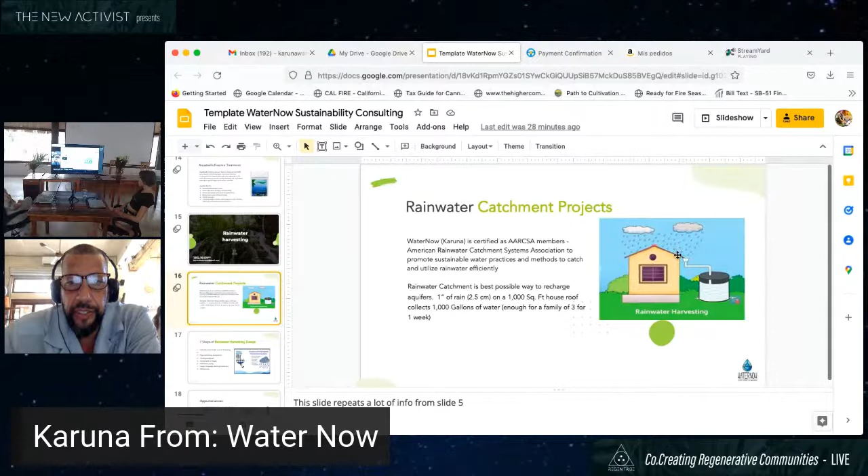They're usually always placed, like as in this picture here, on the corner of a house. So it could be the front corner, it can be the back corner if you don't want to see it. From there, with the roofing coefficient, we can calculate how much yield we're going to get. And then there we can go into the components of the actual system.

For the components here, the things that were needed to install here are a gutter guard screening, and this is basically to keep anything like insects and bugs, etc. out. And then we would use a rain head leaf eater, and then we'd have a tank screening. It's like a second layer of screening into the water filtration into the rainwater.

A water diverter. This is to siphon off extra water so the tank doesn't flood. And then we have the rainwater storage, which is the actual tank. And then we have the overflow system. It's basically a nozzle that can divert water. And then if needed, you can have a pump. And with the submersible pump, let's say a 1/4 horsepower submersible pump, you can put that pump into the tank, and it'll pump it to anywhere.

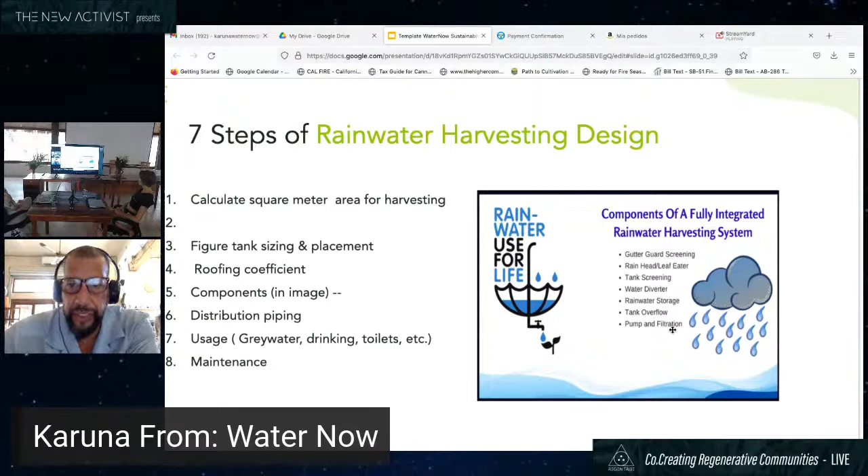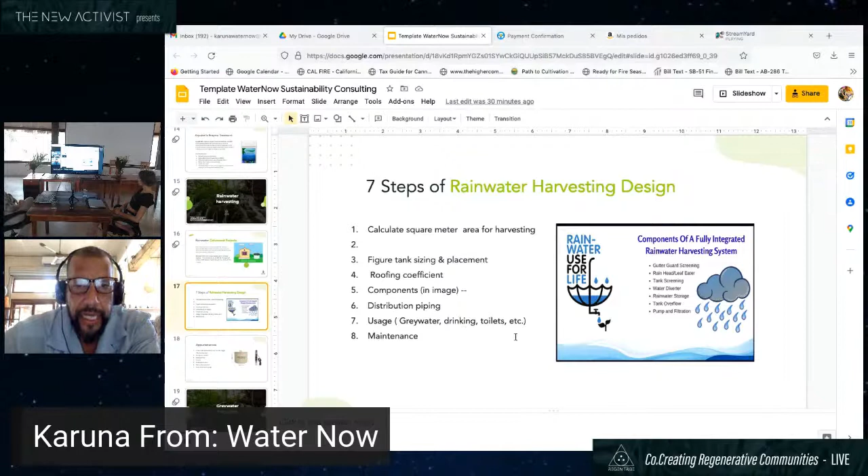You could pump it to your showers. You could pump it through your kitchen. And you could also put a filtration system if you really wanted it to be a high quality drinking water system. So let's see. The next step would be the usage, which could be gray water, and we'll get more into gray water recycling now. And from there, again, you can use this for anything you wanted to use the water for.

Here's an example of a submersible pump and a rainwater catchment tank. This is the 5,000 liter one. This was for quite a deep well, actually, and it was a 1 horsepower pump, and it pumps up to 33 gallons per minute, which is over 100 liters per minute. And with these, again, they have the filters, the screens, the gutters, filter system optional. You can also put a meter and pressure gauge optional if you really want to use this for like a drinking water system, for example.

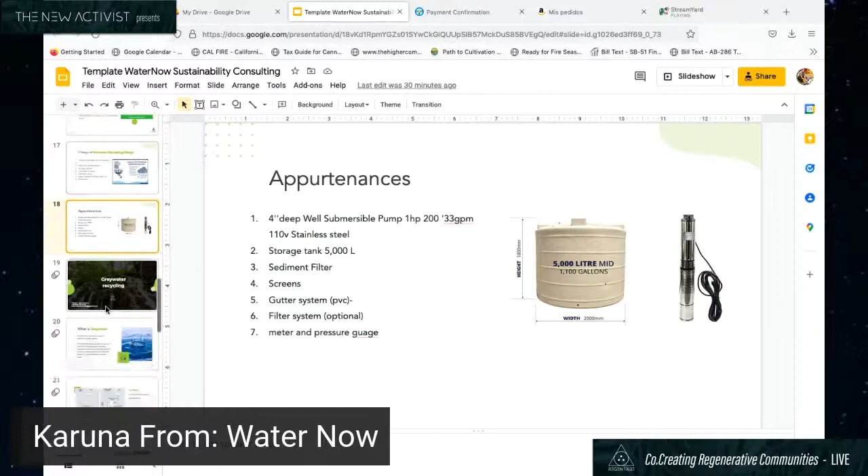Something else I would like to touch on now that's really important and starting to be done more in Europe and some places in the States, to a lesser extent here in Central and South America, is gray water recycling. So, what is gray water recycling? Gray water can be defined as any type of water.

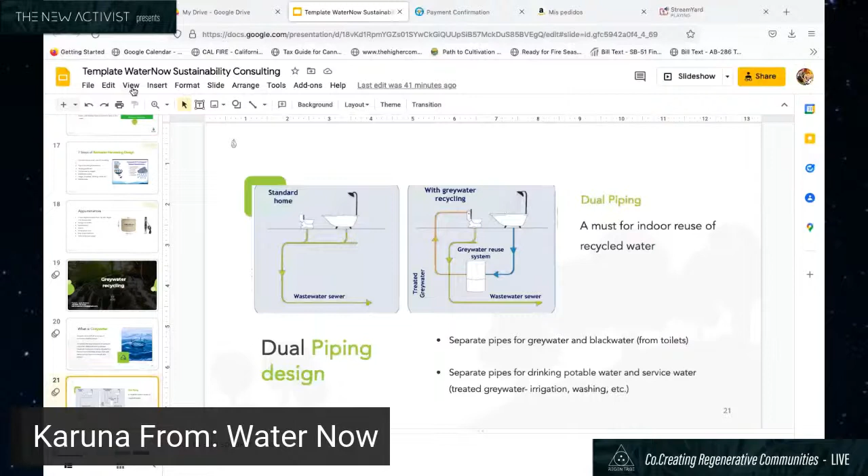So basically, this is the dual piping design here, and basically, wait, let me go to the slideshow here.

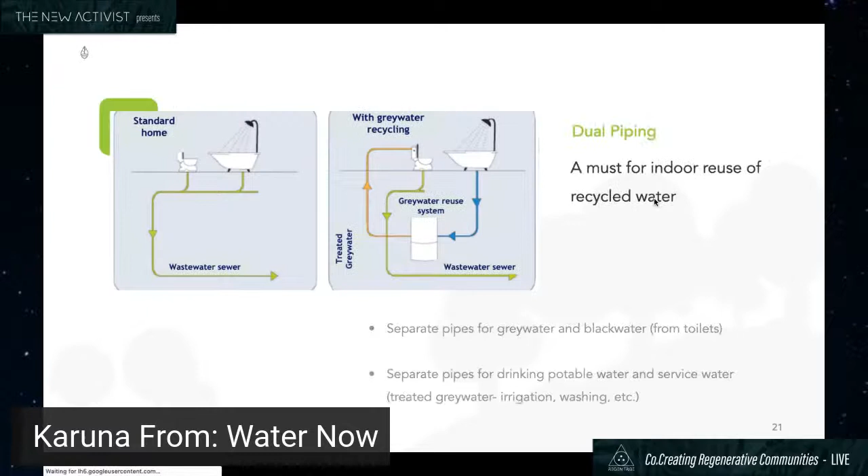Apologize for this. Okay, so this is the dual piping design, and basically, in order to get a gray water recycling system done, it's not really that complicated. It's definitely much easier to do when you're first setting up a community or a home or a system, because the standard home, the way it's plumbed right now, is that the black water from the toilet is connected to the showering system or the bathwater system. So you'll have those two connected, and they all go out into the wastewater treatment.

Then obviously what you have is a lot of gray water that comes from this first image on the left. And then they all get intermingled in, and then they can't be recycled. They have to be treated as hazardous waste or treated some other way from a treatment plant. With gray water recycling, moving to the image on the right here, what happens is that the toilet flushes, and then from there, that is the arrow that goes straight down and into the wastewater sewer system.

And then if it's, for example, a low flush toilet where it would have basically like a urine in there, then that can also be retreated. It doesn't have to go into the black water system. So what you have basically is a gray water reuse system here. And what this is now, and you're at the shower, the bathtub on the top right side, and you have the blue arrows going down here. As long as you're not using heavy chemicals in your shower and somewhat of an organic soap or shampoo, then you can rather easily go through this bin here.

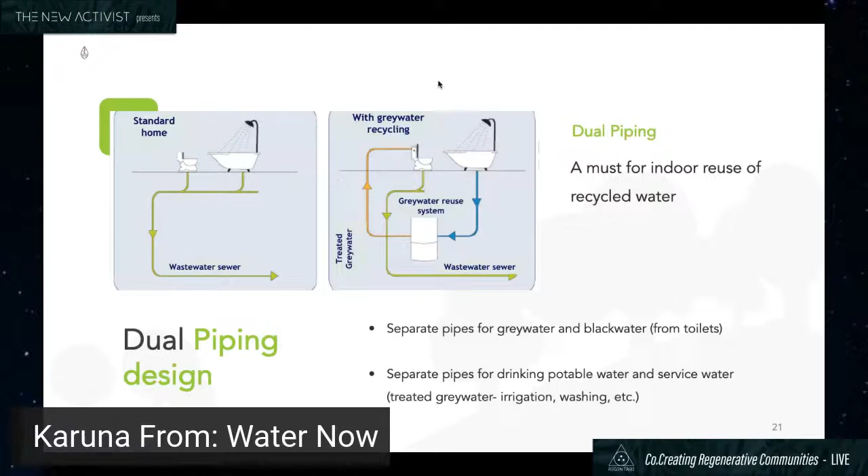So just that one simple step of plumbing your shower system to a gray water reuse system and then back into the toilet, just that one step will save 50 to 80% of water for any household or community or village. And it's very rarely done. Matter of fact, it was illegal in the States up until some years ago, which didn't make any sense. But anyways, now it is actually suggested by most of the communities there.

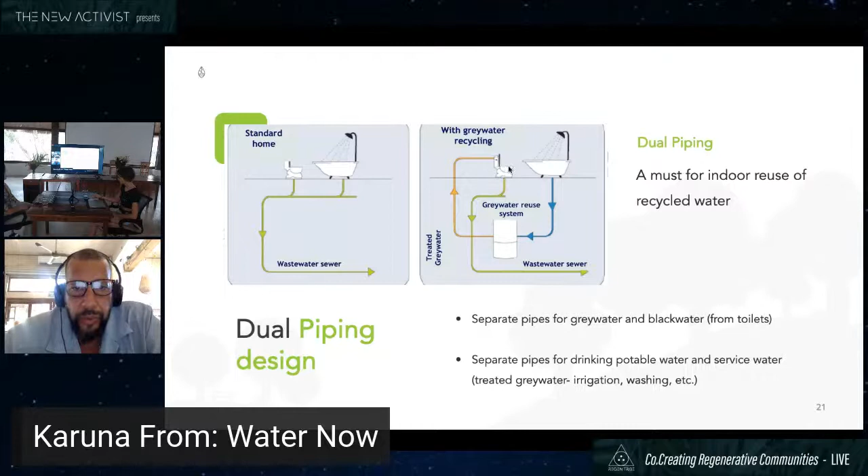Here's some technical considerations I'll go through rather quickly, but a pre-treatment sediment filter stage should use self-cleaning sieves. This would be to remove things that could come through the shower or the bath, like hair, lint, sand, metal, plastics. If kitchen gray water is used, we would install a combined grease and sediment trap. Here's a space requirement per person. So, for example, 3 or 5 people, it tells you how many meters squared it should be. Depending on pollution load, water peak flows, and quality, you can find out how big the piping would need to be. One of the biggest things here would be to label your non-potable pipes and your tapping points to distinguish from the drinking water.

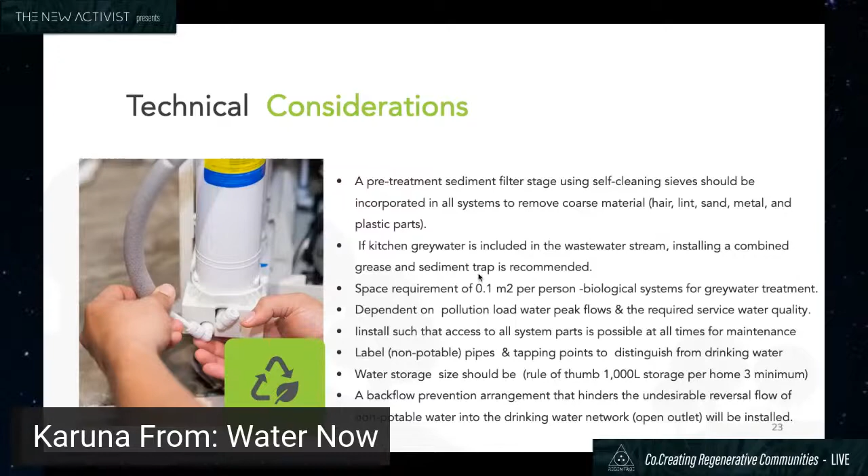And then, as a general rule of thumb, there should be about 1,000 liters of storage per home for 3 people minimum. That's really a minimum. We usually recommend to go well above that. For 3 people, it would be like a 3,000 liter tank. And then lastly, a backflow prevention arrangement that hinders undesirable reverse flow, so that the sewer won't come back up through the system, which is why you get a lot of smells in certain places around Tulum, because they don't have this backflow preventer in there. So then things end up getting backed up through the piping system.

Maintenance requirements. When there's high load gray water flows from the kitchen or washing machines, the maintenance is expected a bit higher. In general, automatic and periodic cleaning, we usually say once a week or once every other week would be good to check the pipes, but sometimes even once a month is good. You can even hook these up to internet monitoring systems and automate them for the flushing systems. And then after a large rain or an event, you would usually go and see how the system is working. But they're relatively easy to set up and relatively easy to maintain.

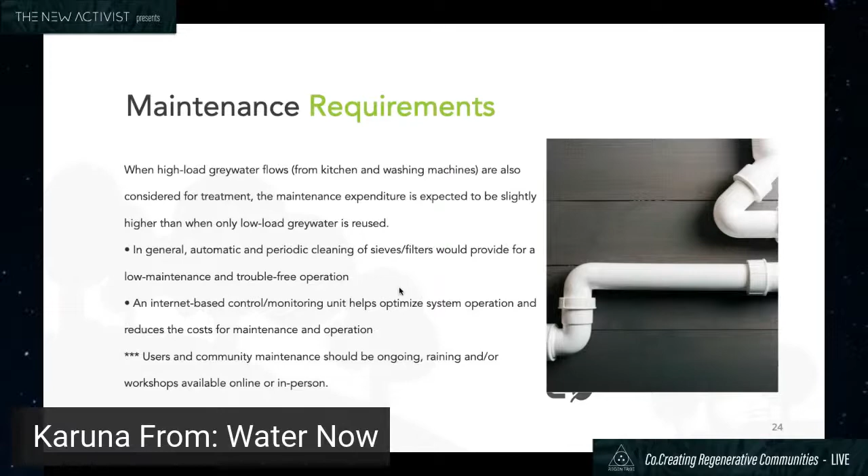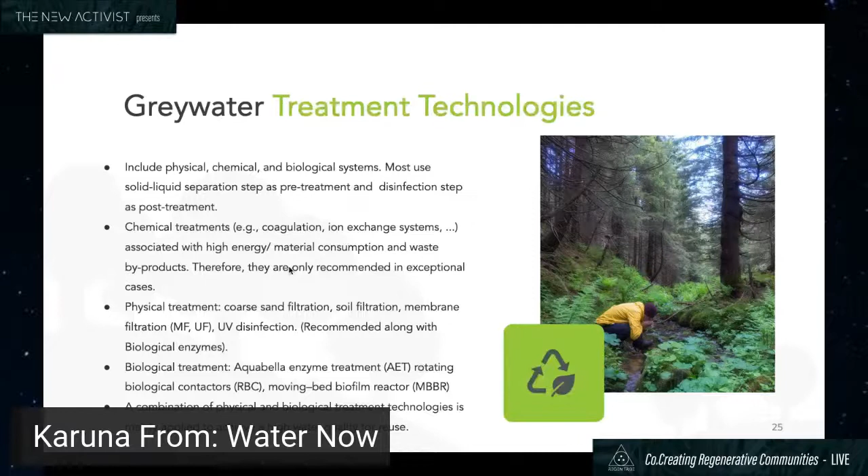So here we can go into briefly some of the treatment technologies. These are basically either physical, chemical, or biological. Most use solid-liquid separation as pre-treatment. The chemical treatments are really high in energy and material consumption, a lot of waste. So for sustainable systems, we really don't recommend chemical treatments.

Physical treatments are actually the most common, which are coarse sand filtration, soil filtration, membrane filtration, or UV disinfection, or biological enzymes. And biological treatments, we'll get into the Aquabella treatments next, which talks about some of the wastewater treatment plant options. And then combined physical and biological treatment is the most common and recommended to really have an effective system.

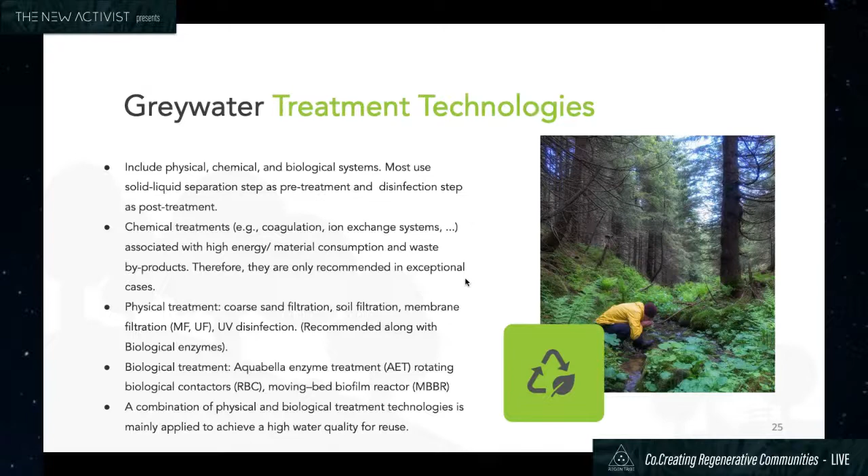All right, so I think I'll pause there and pass it back over to Julia for any reflections or comments so far. Yeah, thank you so much, Karuna. That was excellent. Gave us a really good overview on the different filtration systems and techniques that are at hand to us. One of the systems that we really love using in communities that is natural are humedales that I would love to touch on.

Humedales are natural filtration systems that clean wastewater by filtering it through big rocks, smaller rocks, and sands into different tanks where plants like banana plants, for example, eat the nitrogen out of the water, and going through all of these different stages and tanks essentially leaves the water clean. I'm a huge fan of it. It's totally holistic and 100% natural, and it perfectly connects to permaculture, to another important component of sustainable communities, the food aspect. Would you like to touch on that?

And go. All right, thank you for that. Yes, they're also one of my favorites, the humedales. Let me get back to that slide real quick here. Okay, here we go. So, as you mentioned, wastewater treatment is really important. You have a number of options, including biodigesters and humedales. Let me zoom out a little bit here. Okay.

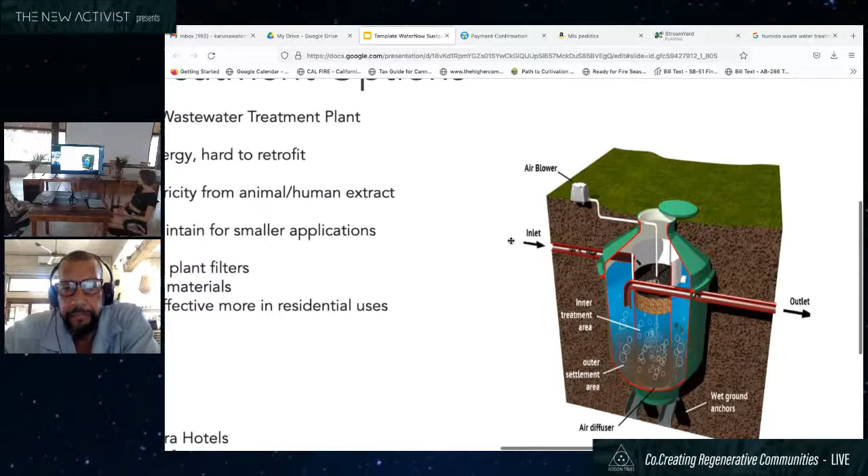Here's one example of one that was used to install, and we're going to explain it here. The inlet would be where waste is coming in, for example. And this is also an example of what can be used as a biodigester or an underground tank to create energy. So you have an inlet here. The inner treatment area is a mix of different kinds of rocks. This image shows it set up within a tank, but it can also be just layers of this out on the earth, which I've seen in Tepoztlan, for example.

So it's coming in here, and then it goes through layers of these things. Here we have settlement areas, like the tank settlement areas. And then you can see the two layers of rocks. You can also put certain kinds of plants in there. In essence, we're slightly underground here. It goes through there. We have an air blower because we want to aerate so that you remove the smell and things like this. So that's why the air diffuser.

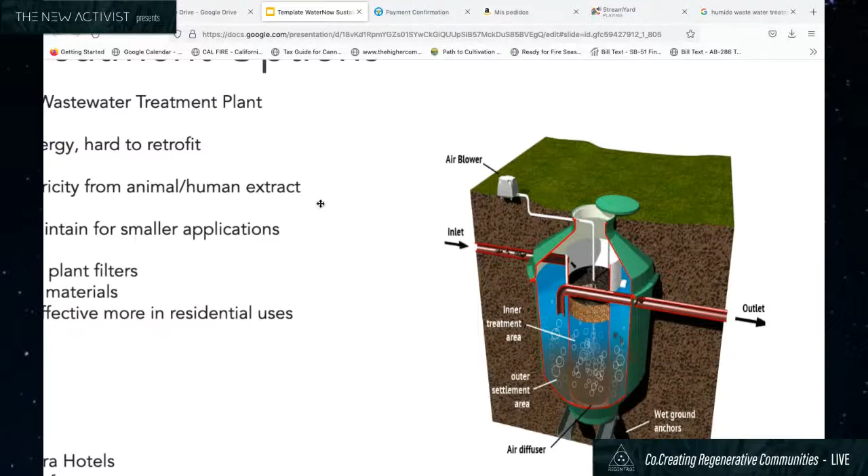And then from here you can have an outlet, and the outlet can go right to your compost or right to your gardens. It's basically fertilizer grade. With this system, you can do a basic flush. The inlet would be from a toilet system going through this, aerated, and out the other way. These are contained systems, but you can have it going through outdoor systems as well. Some feedback is the outdoor systems can be more exposed to elements, animals, etc. So some people prefer the enclosed system, but both are very possible to do. So the biodigesters, we'll go back here.

Oh, wait, okay, here we go.

So the biodigesters and the humedales, one of the really good things about them also is that they're relatively inexpensive to use, and they use all natural materials. So we just set one up here in an area on Kukulkan Road. I put it as a con here that it can produce a smell, but you can have any smell pollution reduced by doing it the right way, with certain kinds of plants and systems that can really filter the waste well.

We touched also on the biodigesters, which help produce gas and electricity, and then the humedales. One of the things is that they are effective in residential areas. They do have an issue when you get into larger commercial areas. We do know one or two hotels that are using the system, and they're using it relatively effectively, although they have to have the system set up away from where their guests are staying and stuff like that.

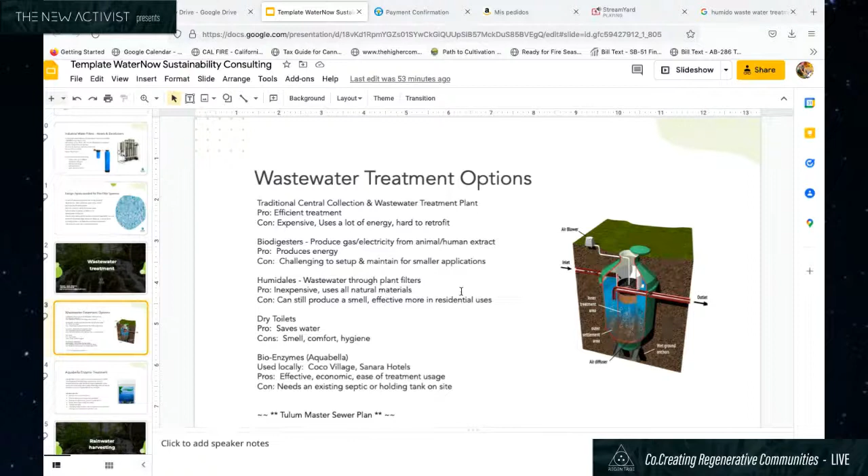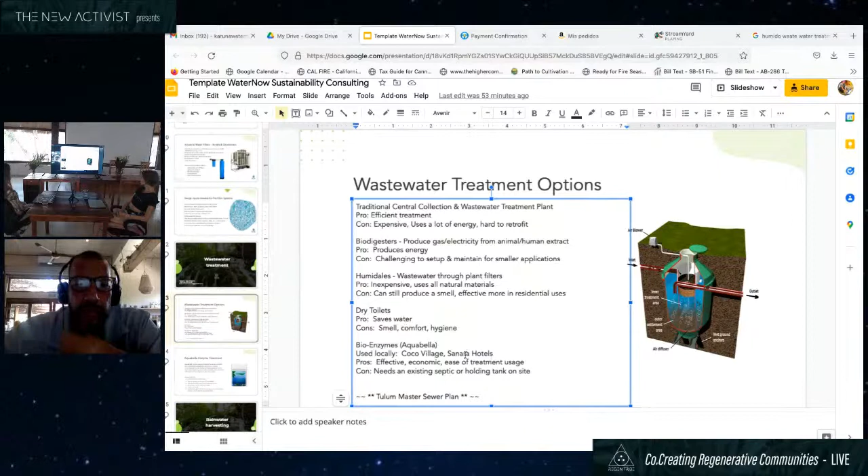A third or fourth one, which we always tell people, hey, don't forget about this option, is basically dry toilets, which saves a lot of water. The cons can be smell, comfort, and hygiene. However, we've been working with one now which is a great technology, from people in Israel as well as California, and it's called Aquabella. This is a natural enzyme. It's been used locally here in the Sanara hotels, Coco Village, and different places.

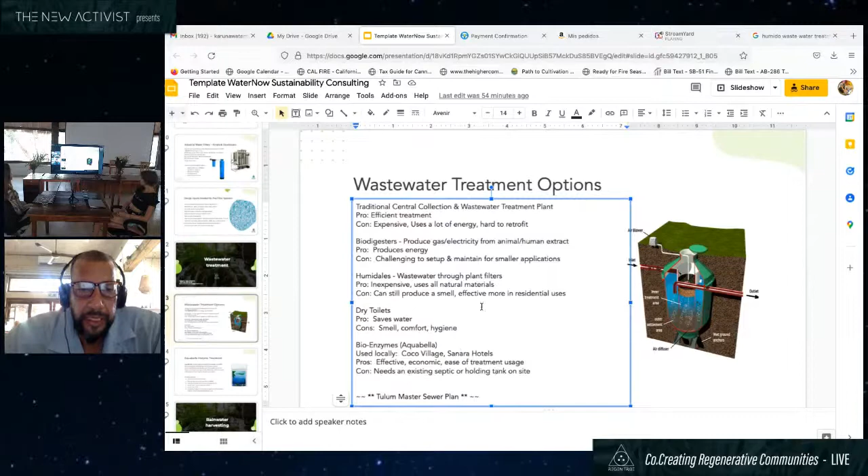It's basically an enzyme that eats up all the BODs and nitrates, etc. that cause smell. It can also be used in cenotes to eat up algae and different things like that. You can use this in conjunction with a humidales system or with a biodigester system, or you can use it straight into a septic tank.

The benefits of using something like this are that it's an all-natural bioenzyme and helps to prevent algal bloom and toxic leachate. With about a week of contact time, it can drastically reduce any bacteria in the water. It also removes ammonia and nitrates, reduces the BOD as mentioned, reduces phosphate levels, breaks down organic sludge and solids, and helps to get crystal clear water that could even be discharged directly into other waters or to the land.

And it's been used in different situations like liquefying sludge, in manure lagoons, even in hog farms, in crisis situations, and helps to avoid expensive excavation costs.

So these are some of the ways right now that we can start to look at regenerating our wastewater systems, because it's such an important part of the ecosystem, especially in places like Tulum where the landfills are full already and where there's no active or functioning wastewater treatment. These are options that can be used right away as point source solutions. So I think that covers my summary for the wastewater solutions at this stage.

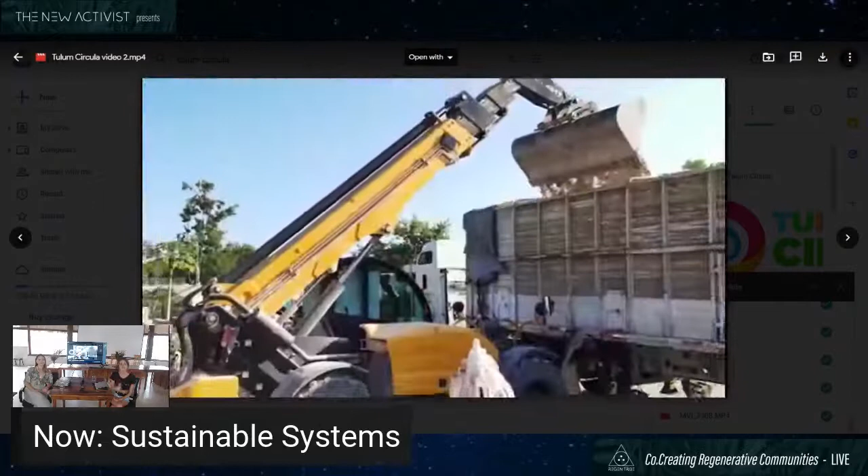And going through this experience of regenerative community and the upcoming nitrogen and food crisis, we're constantly being reminded of how important it is to be autark. To not only be connected and live beautifully in community, but to make use of these sustainable solutions, because we literally need them for our survival. I don't want to be dramatic about it, but the upcoming and increasing shortage, especially when it comes to water and food, is really pushing us to come back to these old and new systems of agriculture and permaculture.

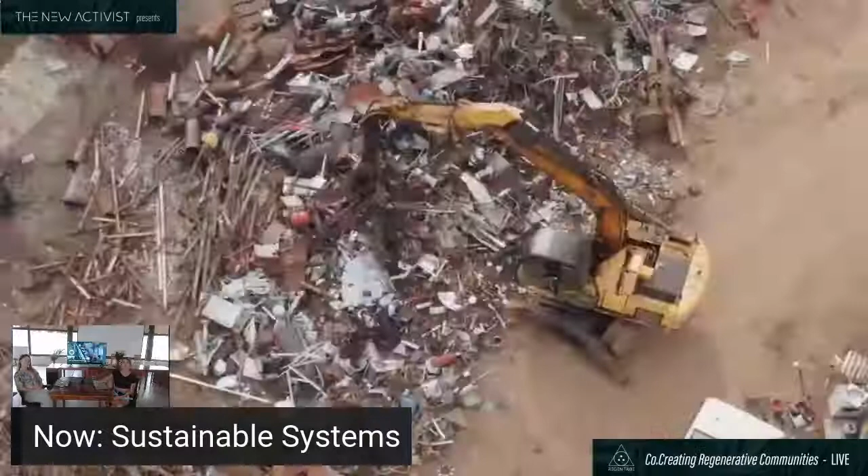And there's many things we can do. We cannot grow all the food that we are consuming, most of the time at least, but we can always partner with other communities, with other farms, and create, once again, intelligent, holistic systems around that. We can use the food that we are growing and turn it into a farm-to-table restaurant, for example, maybe in collaboration with other farms around us. And through that, bring in visitors and tourists and inspire them for this kind of lifestyle, inspire them for the regenerative mindset and for community life as well.

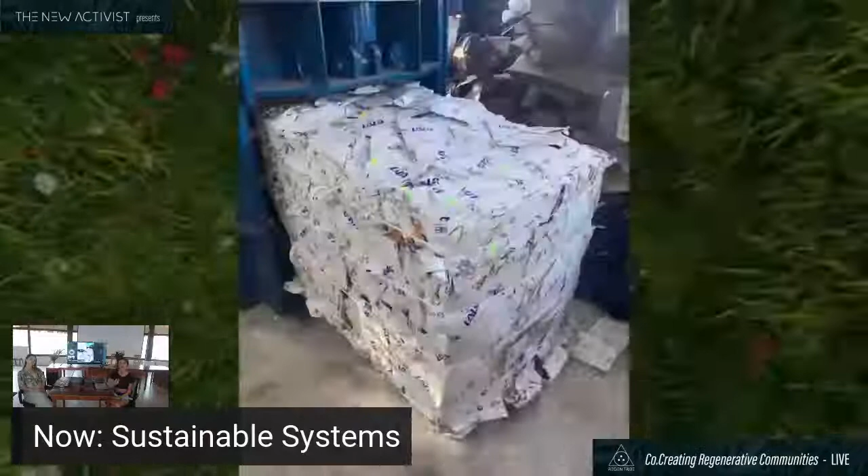Most of us won't move from our London apartment into a regenerative community. This question just doesn't arise, there's too many question marks around it. But we might visit this delicious farm-to-table restaurant, or this awesome event, or this beautiful Airbnb at a regenerative community next time we're in Mexico or in Costa Rica or wherever we are in the world. So these kind of systems and networks allow us to not only live regeneratively and not only generate income, but also inspire others and really move this regenerative mindset forward and spread it into the world.